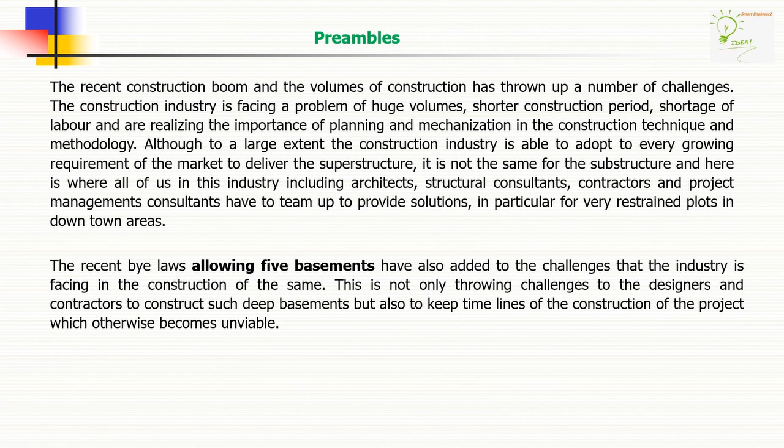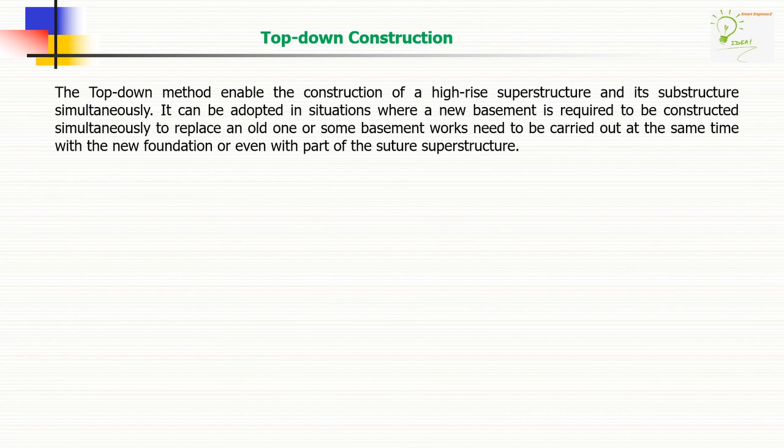Top-down construction. The top-down method enables the construction of a high-rise superstructure and its substructure simultaneously. It can be adopted in situations where a new basement is required to be constructed simultaneously to replace an old one, or some basement works need to be carried out at the same time with the new foundation or even with part of the superstructure.

Top-down or up-down construction methods is another method for constructing deep excavations with construction sequences to take up both superstructure and substructure simultaneously. This method is adopted where fast-track construction of the project is required and the site constraints prohibit using the method of retention not suitable to the site parameters as well as the soil conditions at the basement level.

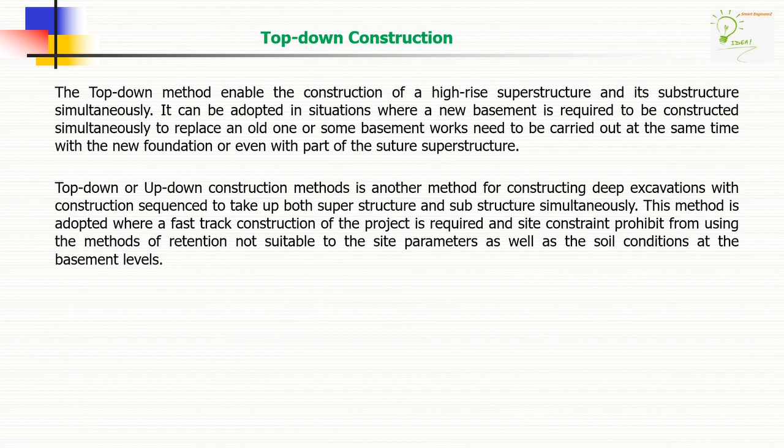Difference between conventional bottom-up and top-down construction. Conventional bottom-up.

Number one, installation of retaining wall. Two, excavation and installation of steel strut.

Number three, excavation and installation of steel strut. Four, construction of underground structure.

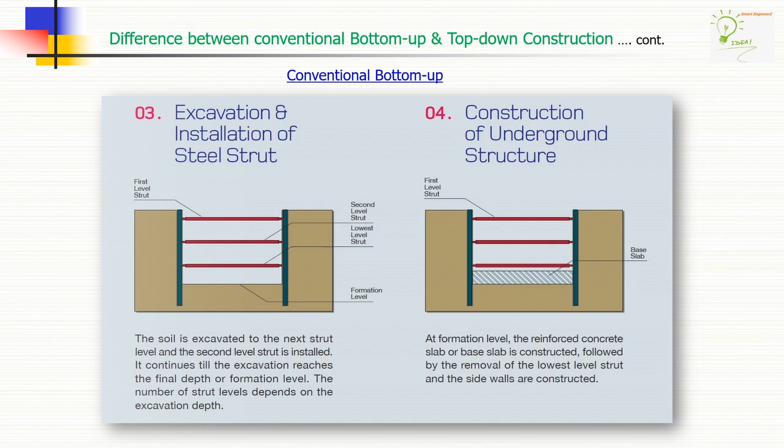Five, construction of underground structure continued. Six, backfilling and reinstatement.

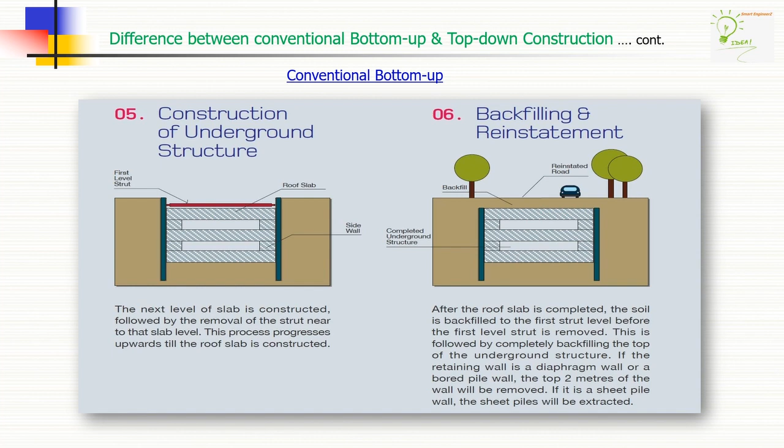Difference between conventional bottom-up and top-down construction continues.

Innovative top-down construction methodology. Number one, installation of retaining wall. Number two, excavation and installation of steel strut.

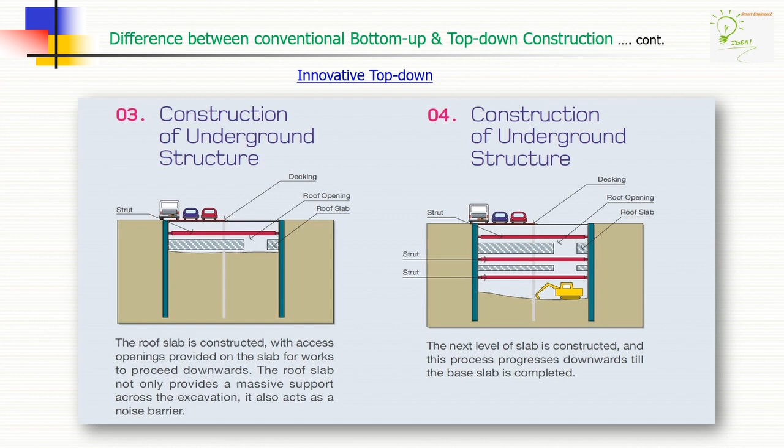Number three, construction of underground structure. Number four, construction of underground structure continues.

Number five, construction of underground structure continues. And then number six, backfilling and reinstatement.

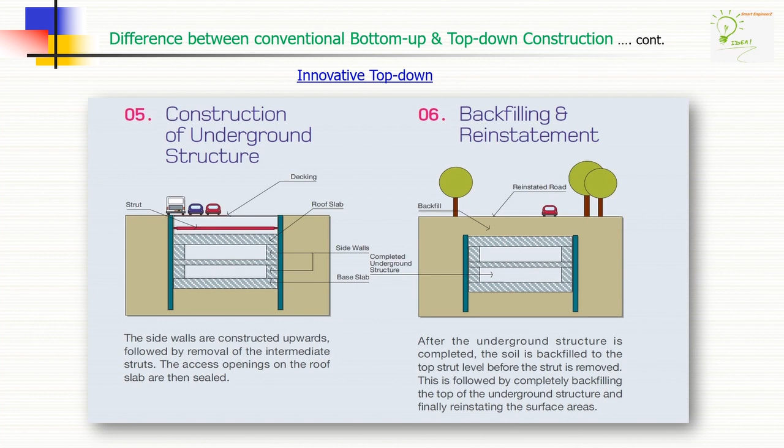Now, here the sequences are enumerated below for ready reference and records.

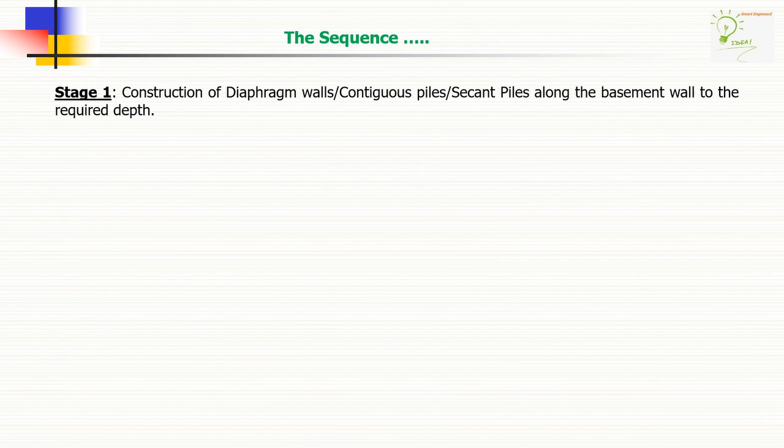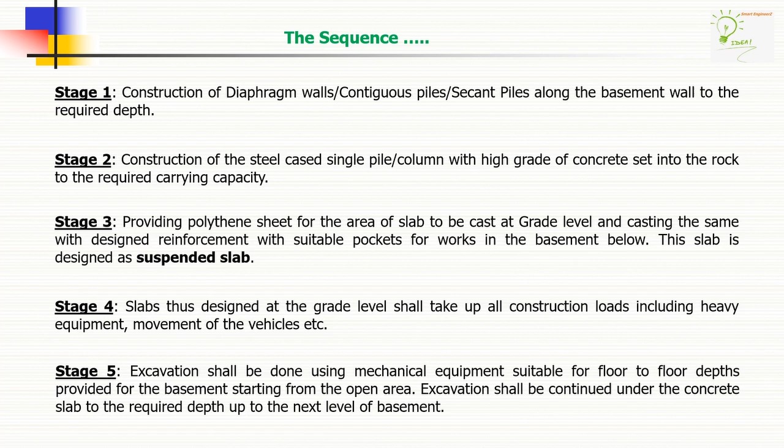In this slide, from stage 1 to stage 5, please go through in detail.

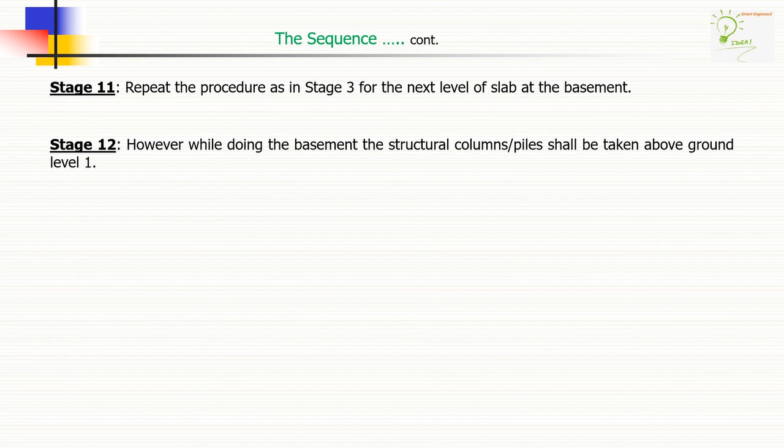Please pause the video and go through each and every stage in minute detail for your clear understanding.

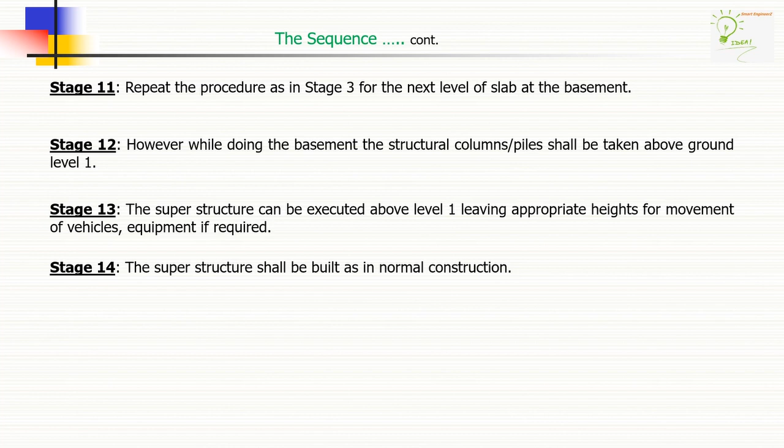Top-down construction overview. Let's watch the animation.

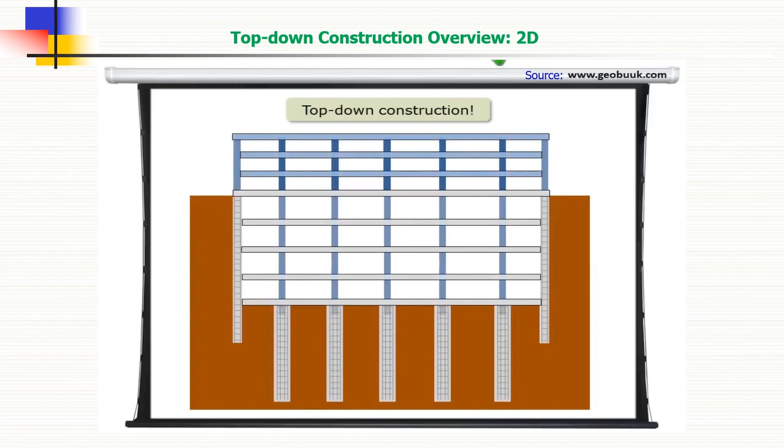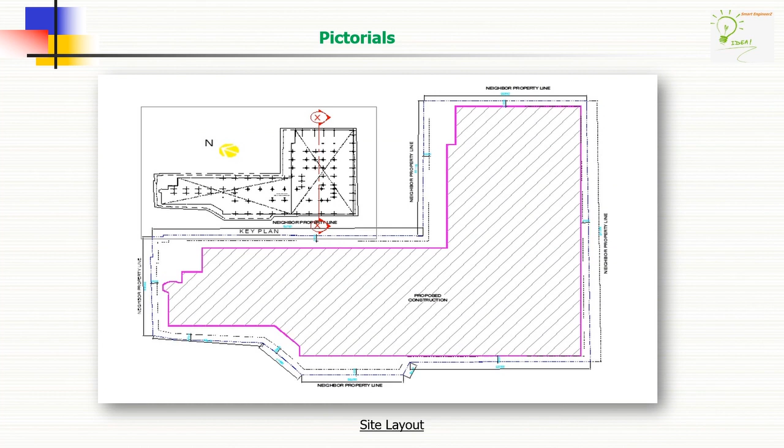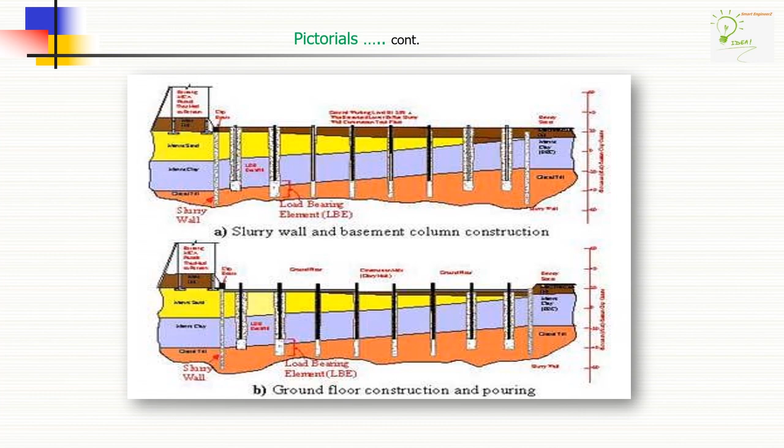With ground floor construction and pouring, excavation and floor construction under and above the ground floor.

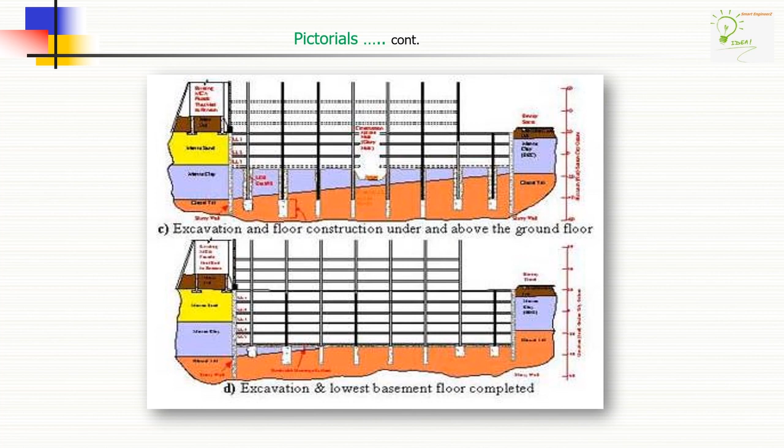Excavation and lowest basement floor completed, basement ventilation system.

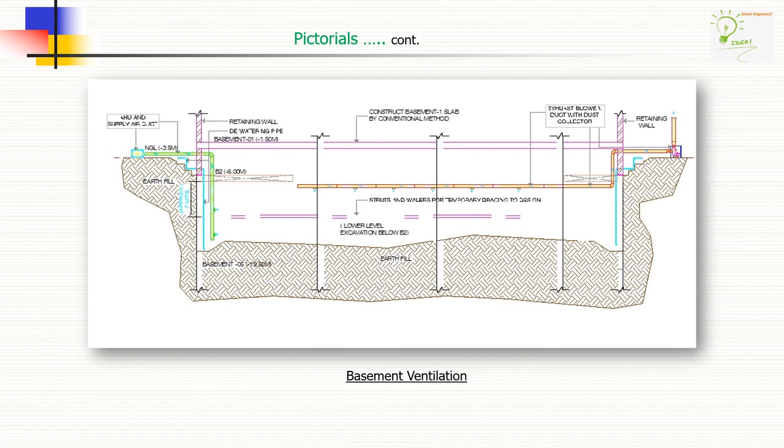Section through top-down construction, basement excavation.

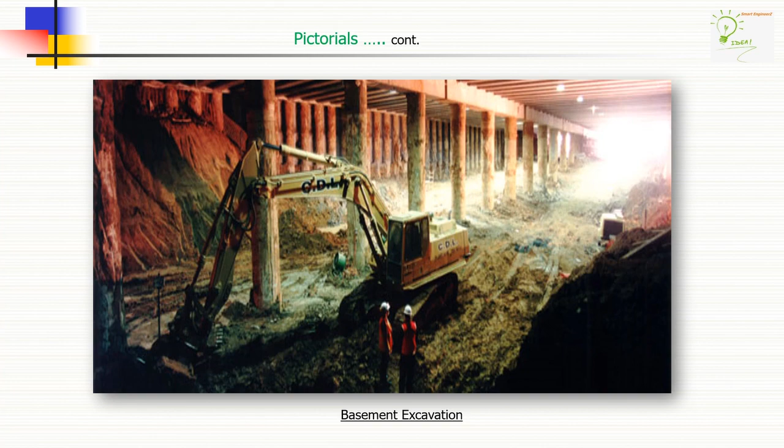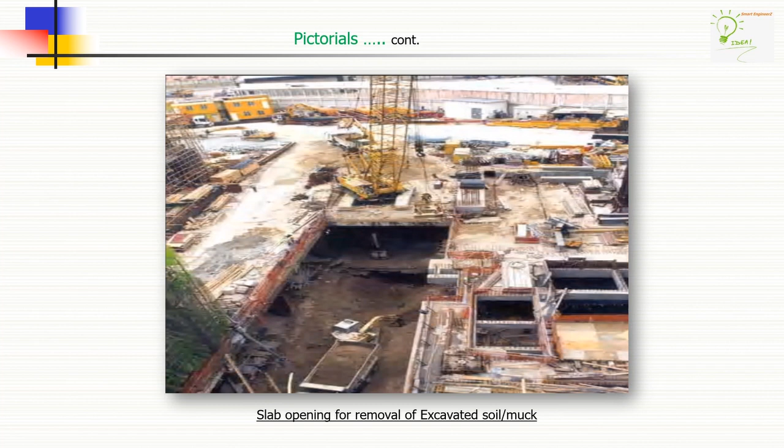Slab opening for removal of excavated soil/muck, access of materials through cutouts.

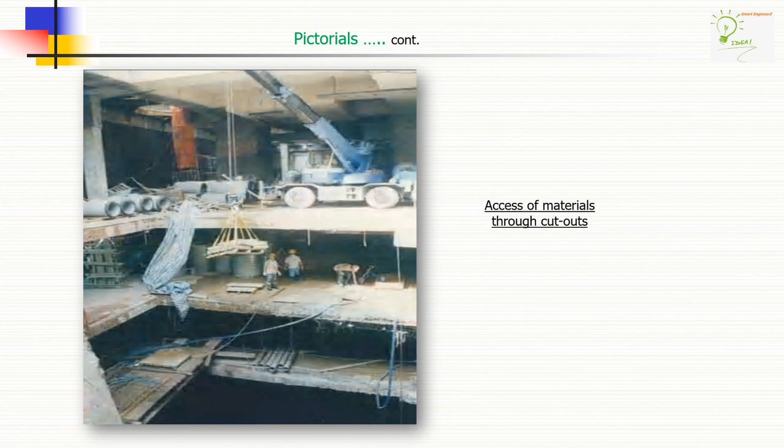Excavation inside basement, temporary shoring arrangement to stabilize temporary shaft opening during the excavation or basement construction.

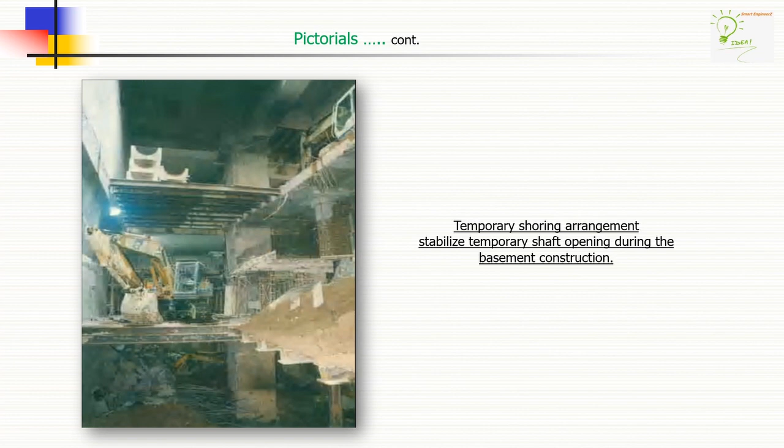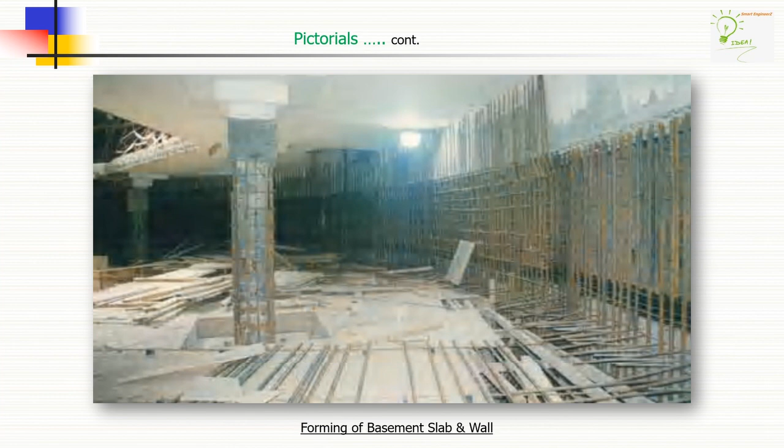Forming of basement slab and wall, forming of basement slab.

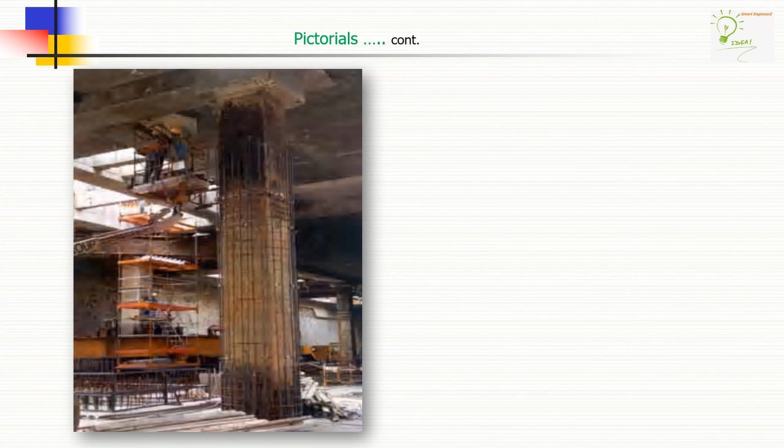Forming of basement columns, pile head being exposed.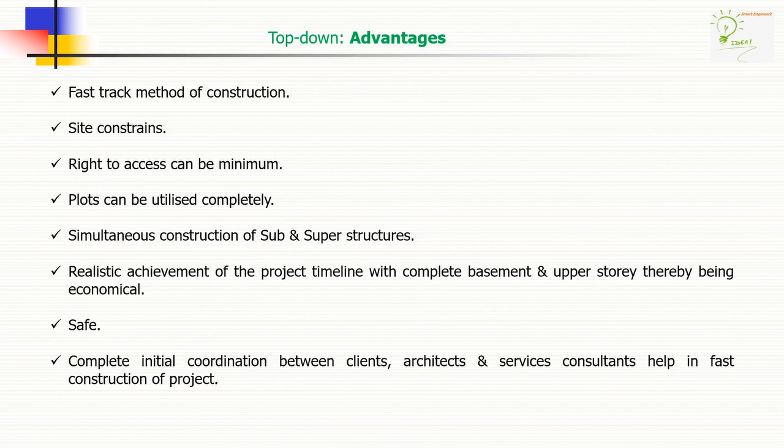Top down construction disadvantages.

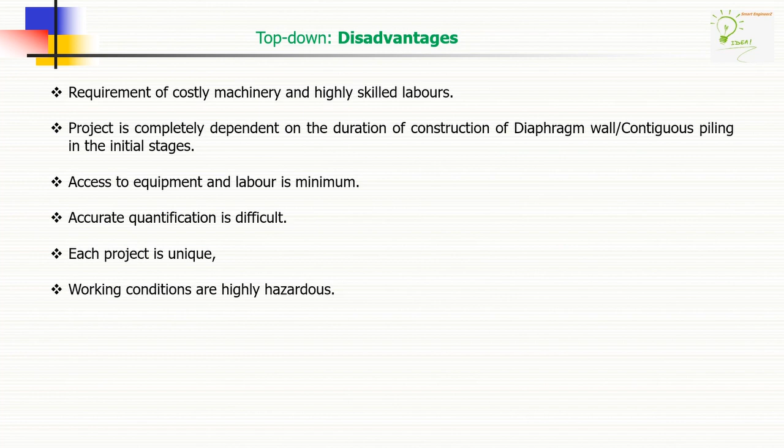Selection. It is difficult to generalize the use of a particular construction method since each project is unique and has any number of constraints and variables that should be evaluated when selecting a construction method.

The following summary presents conditions that may make one construction method more attractive than the other. This summary should be used in conjunction with a careful evaluation of all factors associated with a project to make a final determination of the construction method to be used.

Now, conditions favorable to bottom-up construction. Next to it, conditions favorable to top-down construction.

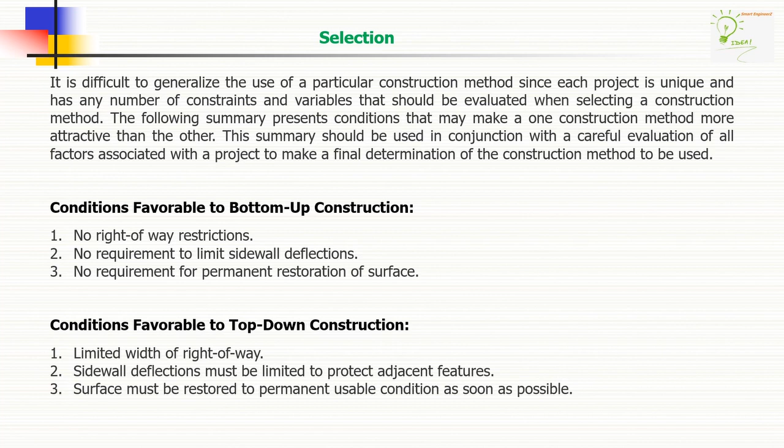Conclusion. Of all the various methods of constructing deeper excavation or basements, the most suitable and safe method is top-down method. This method helps us to retain earth irrespective of the site constraints.

Projects in the neighborhood of properties have fewer problems with groundwater table. It also helps us to utilize the plot completely for the basements.

This also helps us construct in places where the plot is restrained, as in central business districts. Projects with deeper basements become economically viable and time bound with this method.